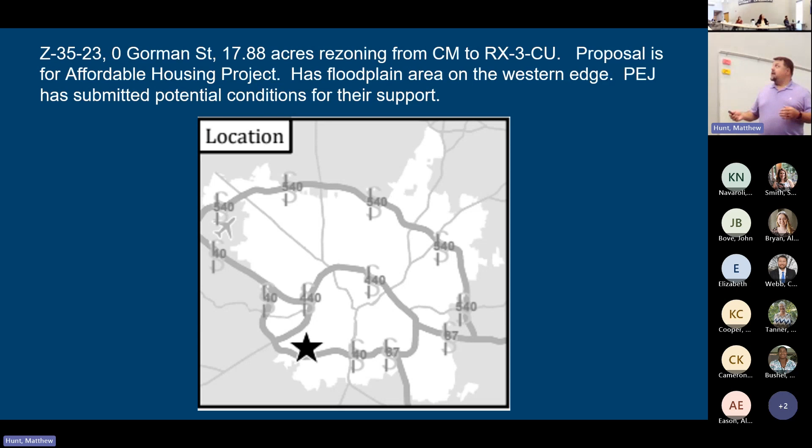So the first one is Z3523, 0 Gorman Street. This is the location in town, on the southwest side. Basically going from conservation and management, which is essentially a zoning district where you can't do anything except preserve that area in its natural state, to RX3 conditional use, which would allow a denser 3-story building, usually like an apartment building or something like that. So this is the zoomed in area on Gorman Street here, outlined.

The floodplain is on the western and northern edges of the property here. I've also done a topo map, not great to see on the presentation, but everybody crowd around and look at it. You can see topo lines. The southern portion is pretty flat, and the more northern portion has got some more fall, but it looks like a continuous slope going down to the creek.

Essentially what they're looking for, the applicant has stated this would be for an affordable housing project, which is something the city is very much in favor of, getting more affordable housing, but it does have some floodplain issues. The Partners for Environmental Justice have actually commented to the Planning Commission with 6 conditions they'd like to see added, one of which is completely around staying out of the floodplain and that sort of area.

They didn't recommend disapproval or denial. They just sent it back to the city council to schedule a public hearing, and that was to allow the applicant to possibly incorporate those conditions that the PEJ had asked for. So that was why it was deferred to city council Tuesday as well.

On the October 17th meeting, the applicant will incorporate all those conditions in some form or fashion. I believe Wade was out at the PEJ meeting last night, and they did discuss that they were having those discussions with the applicant. So that's where that stands. With that being the case...

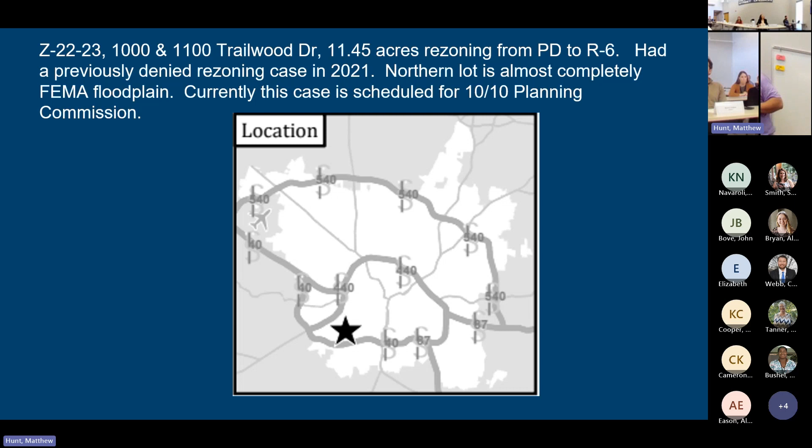The next one is, like I said, the one we talked about previously last month on Trailwood Drive. The star looks almost exactly the same place, apologies, but it is pretty close to the same zoomed out location. This is the one that has one lot that's almost completely floodplain. The other lot is at the top of the hill, not really floodplain, but it's adjacent to some neighbors in the ETJ that don't necessarily want townhomes or apartments next to them. This one's going from a planned development district to R6.

Issue one about this one is it was a previously denied case back in 2021, and it's back for similar approval now, so it's curious to see what kind of conditions we're putting on this one. Currently, the case is scheduled to go to the October 10th planning commission, so it's not even close to setting a public hearing at this point.

The Partners for Environmental Justice has this on their radar too, and they were going to take a look at this case and possibly submit something to the planning commission for their consideration as well. Staff has stated that we'd like to see them stay completely out of the floodplain, because even though we've got the UDO ordinance, there is a variance mechanism in that.

That was not a legal way I said that at all. I apologize for me stumbling over that. That's what I was trying to wrap my head around.

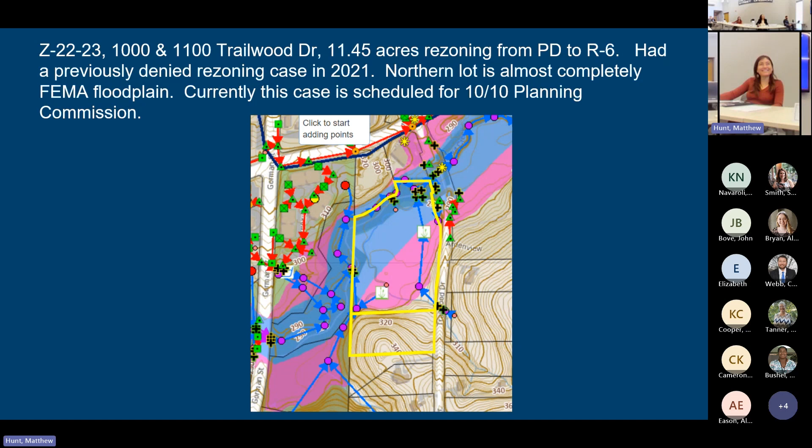Any other questions?

So this was all on the northern side of town. Up on Strickland Road, in the Falls Lake watershed, 16.25 acres going from R4 to R10 - R4 is 4 units per acre, R10 is 10 units per acre. The curious thing about this one is it was a previously approved rezoning case in 2021 to go from R1, which is more rural residential, to R4.

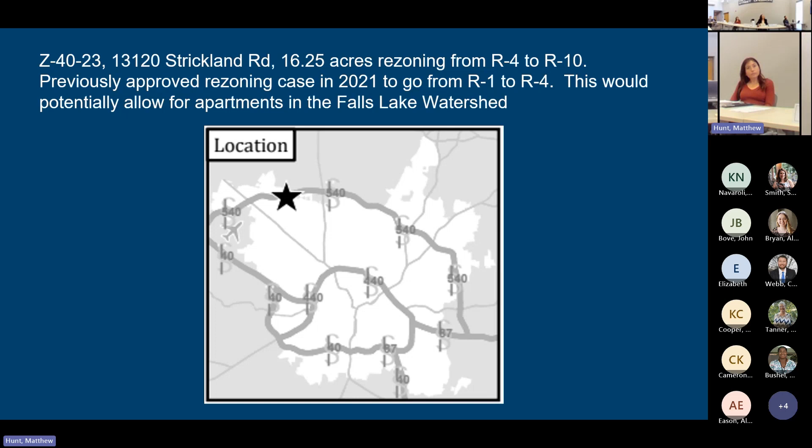So this would potentially allow for more density and possibly apartments. I'm not sure exactly how the R10 section works with garden apartments in our Falls Lake watershed. This is Strickland Road and Leesville Road, and there's a Harris Teeter Shopping Center right here that drains away from the watershed. This undeveloped piece drains for the Falls Lake watershed.

I know there have been some design issues from the 2021 case where this Neuse River buffer stream was restricting access from the south. There was talk of going through this neighborhood street, which is a built street to their property line. I have not seen what their updated site plan is for this one. Right now it has gone through one round of review from staff, and we've asked a multitude of questions from many different trades, and we have not heard back anything from them.

I appreciate this being brought on our radar, especially in light of discussions we're having with the Swift Creek area of land, and this kind of dovetails into that proposal. I think there'll be much more to come on this one, so it won't be falling off our presentation anytime soon, since it's not even set to go to planning commission yet.

This site's going to look at a lot. This one was flagged for me by some folks who live in the area, and I know the previous Neuse River keeper walked the site. One thing they brought up that's not on the map is just to the east, a little public park - I'm not sure what stream runs into Falls Lake, but it runs through this public park. There was concern about stormwater impacts to the public park, as well as the topography, which we can all see.

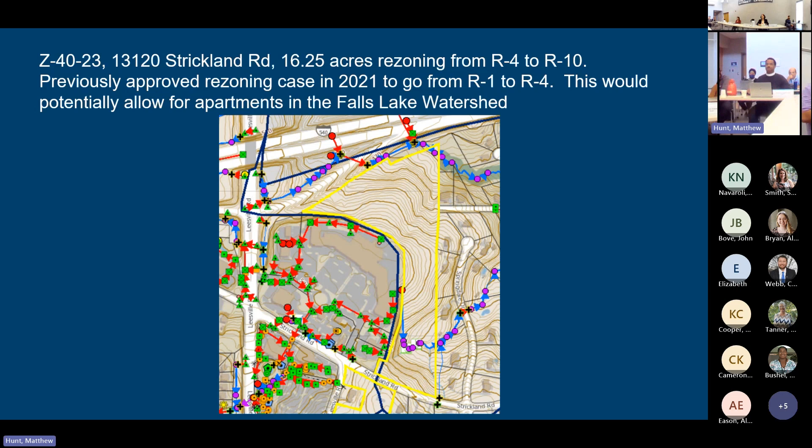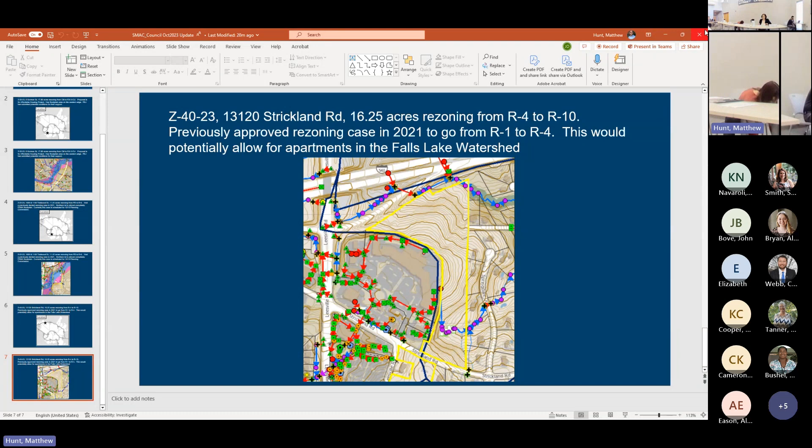All right, the next item is the SMAC work plan conversation. This came out of our meeting last month, around having more ownership around the work plan, which is our document. So this will be on the agenda every month to keep it before us. If you have your PDF, the work plan begins on page 9. I thought it'd be worth looking at this, not spending a ton of time, but I wanted to codify it in the agenda as a constant item. Any comments on the September meeting as you look at the work plan for 2024, things you want to discuss?

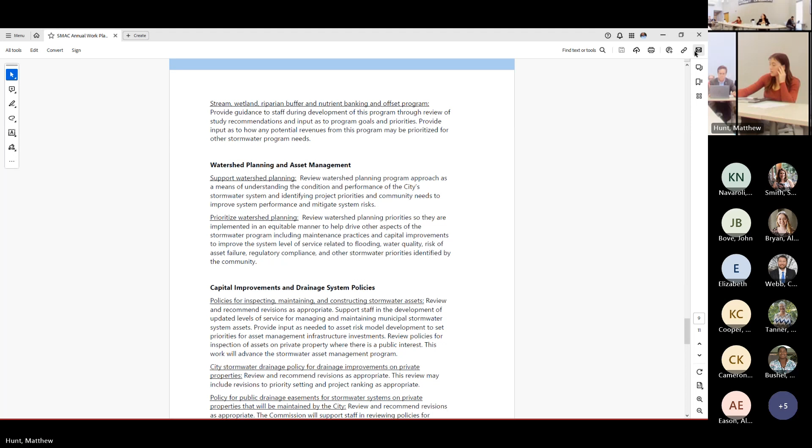I know we talked last month about maybe a subcommittee. It escapes me, I think it was David who suggested it. I guess the minutes would capture what specific subcommittee that was, if I remember. So I typed it to be. Okay, so I just want to hold space if there are any comments.

It was item number 7: development of enhanced stormwater utility crediting policy and program. Does that sound right? Which page - the group PDF is page 9, let's see, this is page 11. But that's not right, it's like 5 but not 5. I guess I'm looking at two different documents, and I didn't even talk about it. Yeah, that's the annual report, page 3 in that document.

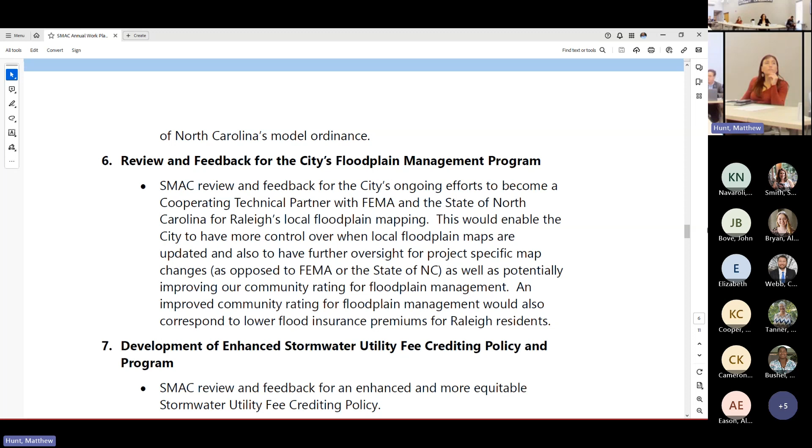Right there on page 5, just scroll up. That's it, yeah, right there - development. This is a topic we have a consultant studying ongoing right now, and I do think it could be appropriate for SMAC to have a separate group discussing this. We could bring this forward as an early draft with the ideas that have been explored - that might be the appropriate time to send it to a committee for a little bit more feedback and discussion, if that was something the commission desired.

When would that be, what's the timeline? Pat, what do you think, or Scott, what's the timing when we might have a draft on that fee credit? Early next year, maybe. Okay, alright, so we have some time. Good, yeah, I think that's something. What do you commissioners think? Are you going to present it again? I mean, you guys presented it. Yeah, so present it.

Yeah, then we could make a subcommittee. Okay. All right.

Anything else related to the work plan? I like the idea that it's part of our agenda, the last thing, as a reminder - we've used that on other boards and commissions too, just to make sure we're thinking about what we said we're going to do.

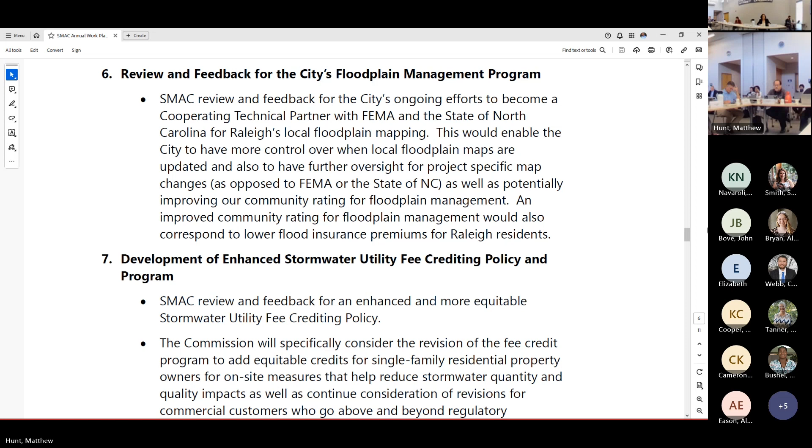All right, Wayne. We don't have staff updates, but I'd like to take this opportunity to introduce Mr. Whit Weaver, who has joined us today.

Mr. Weaver's here primarily, I think, for the update from the Upper Neuse River Basin, which will be a presentation later on in the agenda. Forrest Westall is also here to present. Thanks for joining us, Whit.

I'd like to also acknowledge Ms. Ann Franklin, who's here - a former city council member with the city of Raleigh, and also currently serving on the board of Partners for Environmental Justice. So thank you for joining us.

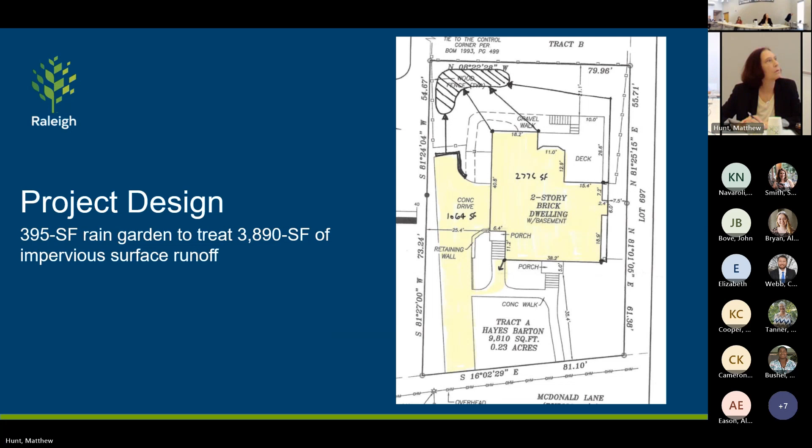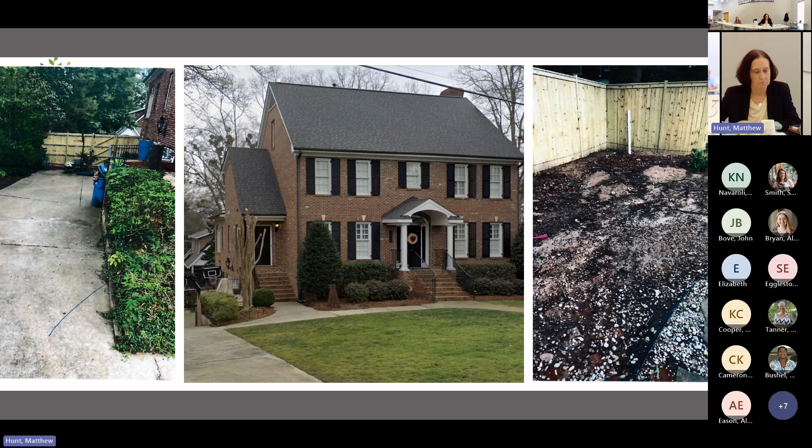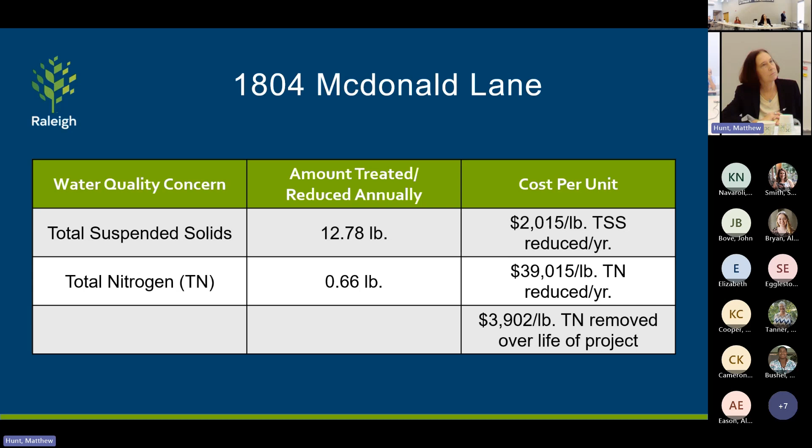Pollutant removal chart - we are removing 0.66 pounds annually of nitrogen. Here are these cost metrics as you've seen in the past, the cost per total nitrogen reduced per year and the TSS reduced per year. I'd say that's fairly in the mean, a little bit slightly above the mean of all projects for rain gardens.

3704 Bryn Mawr Court. This is in the Simmons Branch watershed, which is a 75% zone. This is another 300 square foot rain garden, fairly large. Here's a general project design that's designed to capture 3,000 square feet of impervious surface.

As you can see, there's a driveway, walkway, and rooftop that all goes to one rain garden in the back right corner. Also, not on this map, right on the fence line to the north is a sanitary sewer pipe. I didn't have a plat map, so I wasn't able to present that, but we've confirmed by email they will stay out of that maintenance easement. There's plenty of space for that.

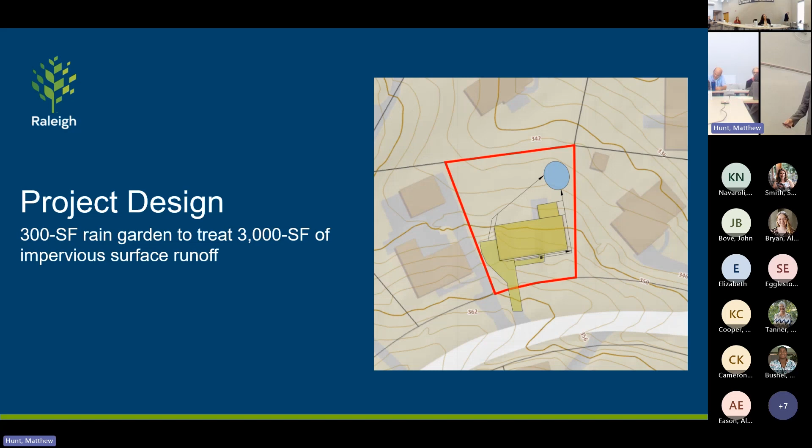Yeah, this one was quite an interesting scenario because he was getting high costs, upwards of almost 17,000, and that was pretty typical, and he was having a hard time getting 3 bids, so we pushed back on him.

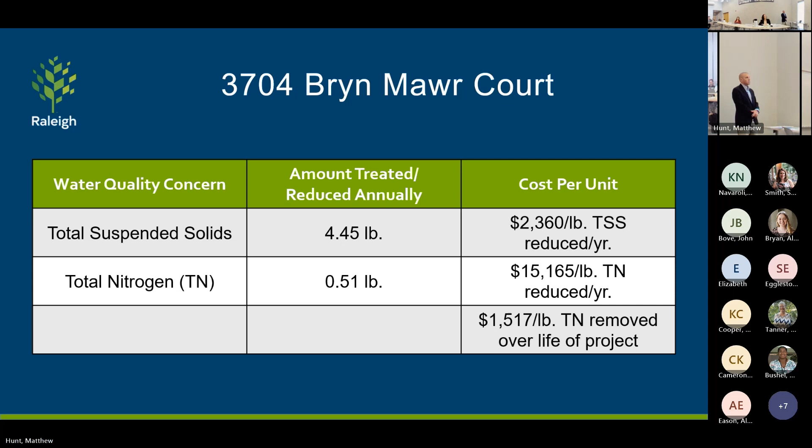Yeah, very good metric.

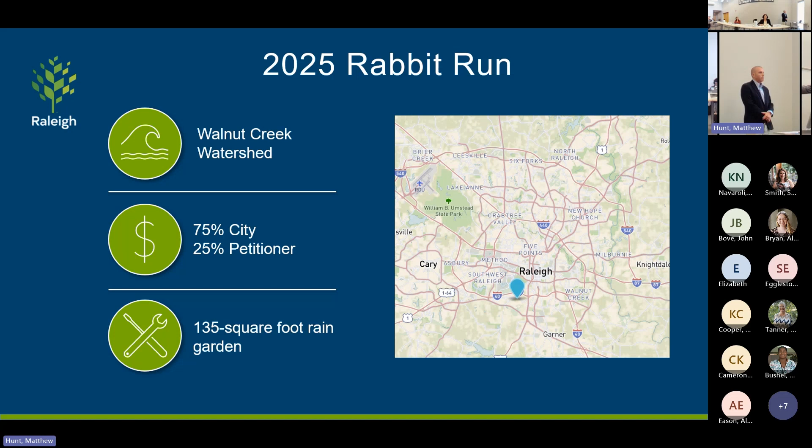Right, next project, 2025 Rabbit Run, which is in the Walnut Creek watershed, 75% reimbursement zone. This is a smaller rain garden at 135 square feet. Project design treats 1,350 square feet of impervious surface. So essentially, it's roughly half of his rooftop plus some of his driveway.

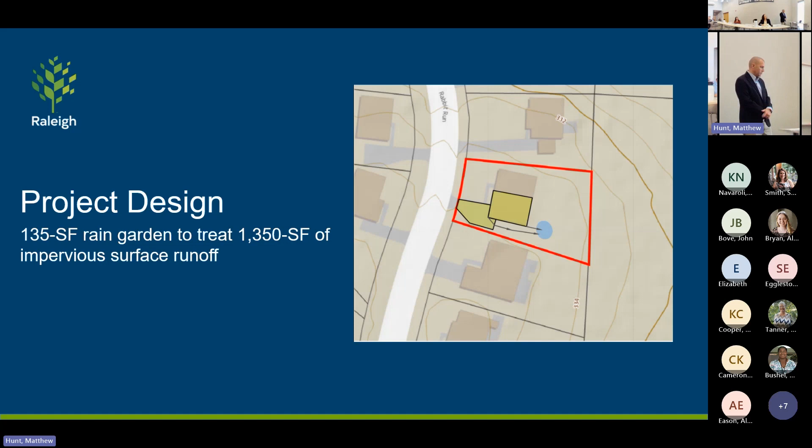Cost breakdown, 10,500. Two cost estimate line items are to the left based off the estimate and the cost breakdown for the cost share.

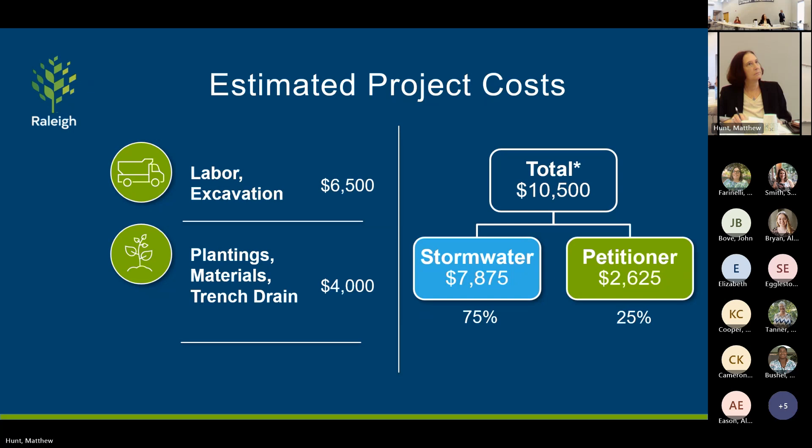Significantly lower pollutant reduction, so 0.23 pounds reduced annually for total nitrogen, and 4.45 pounds of total suspended solids. So as you can see, this metric is high comparably, but it is below the $7,000 per pound total nitrogen.

And lastly, for me, is 3327 Cheswick Drive. This is located on the north side in Big Branch, 75% zone. Once again, that comparable 291 square foot rain garden.

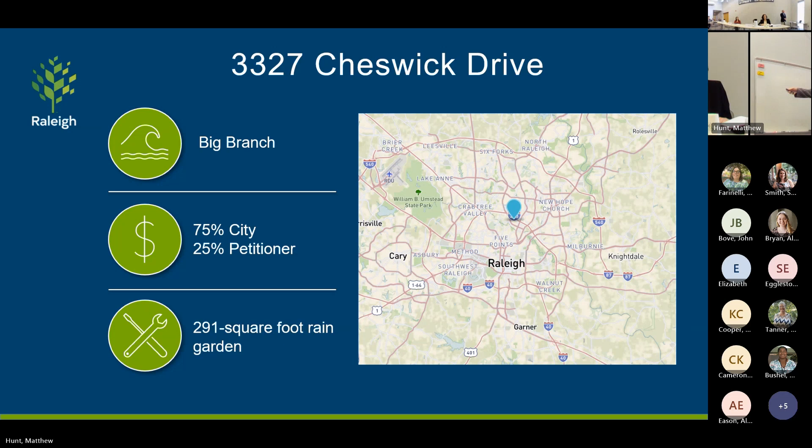So this project design is going to have, let me go over here, it's going to have 2 rain gardens, one located to the left and one located to the front right there, for a total of 291 square feet of rain garden, to treat 1,914 square feet of impervious surface, so a little oversized.

Total cost for this is $21,088. Their cost estimate broke down to 2 rain gardens, and their labor and effort: 11,047 and 5,754.

This portion of the concrete is going to be removed and replaced with that footprint of that rain garden. So those costs are represented here, this concrete removal. And then you had a separate line item, or the company had a separate line item for plantings.

Total nitrogen removal rate similar to the first two I presented, at 0.41 pounds. Total suspended solids is 6.94 pounds. This is a very high metric in comparison with other rain gardens, at 51,434 pounds reduced per year.

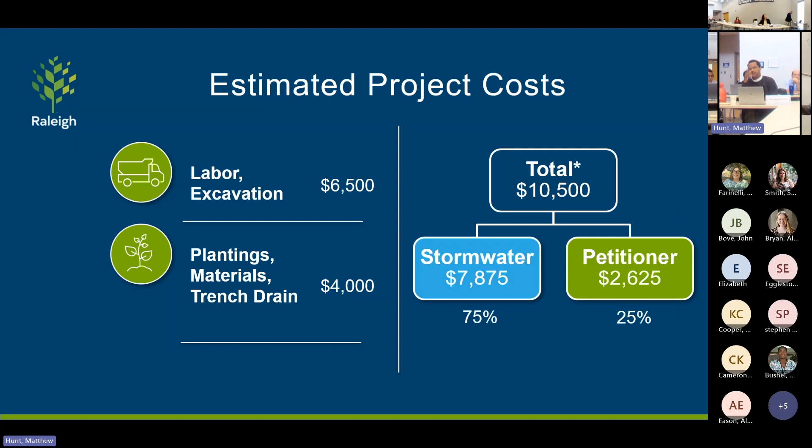The previous one, Rabbit Run, you had an asterisk by total and I didn't see it. Oh yeah, that's a great question. I apologize, I meant to disclose that. What's that asterisk? So in relation to Nicola's question...

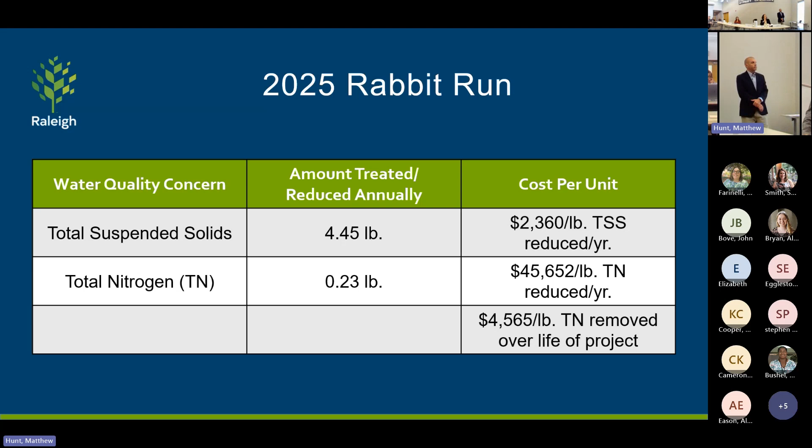For example, $10,500 was the newest low bid that they got. The next highest bid, I believe—and I have a graph at the end here—was in that $13,000 to $17,000 range, and they were bidding at $5,000. So typically we would say, hey, this is the basis for reimbursement, you disclose this. But they gave justification, and I wanted to present that to you.

That's true, and I apologize, I missed that asterisk, so I appreciate you asking. So the Braemar family or group did not request it—they did actually request it, but at the time we were going back and forth and they accepted the end result based on conversations with Justin, that they would use that $7,000-plus bid. This was actually a pretty good exercise that Justin and I went through, working through the legal side of this and what was approved with council.

All right, Cheswick breakdown. Good. All right, I'll hand it off to Justin.

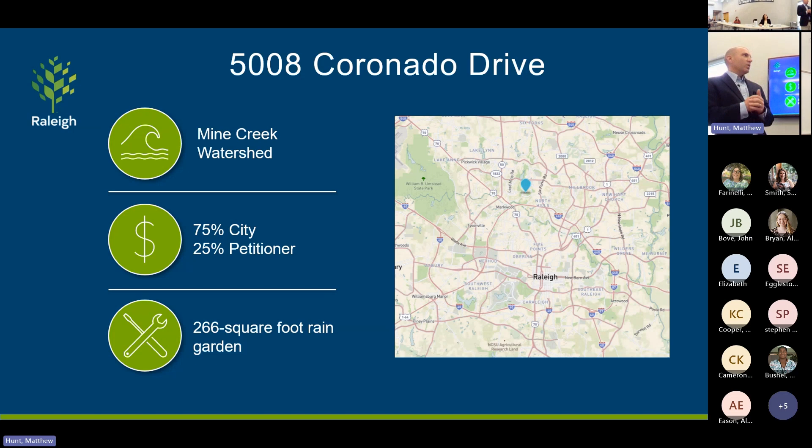Yeah, and just to remind the commission of what our policy does require: it says in the narrative of the policy that for projects over $5,000, we need to get multiple bids. It's vague, so we applied a procurement rule guidance to get three bids, as we would if we were doing city business. So where the nuance lives is in how we do our due diligence and how we confirm that the applicant does their due diligence.

That's where a lot of times we'll get proof of 3 estimates, and then we'll look at that metric, which is the language of this program and how we communicate these projects to you guys. At the end of the day, the metric is really that main comparison factor. But just know that's the inside baseball of what occurs when you see a final number up here.

There's that conversation. We need 3 estimates. We need proof of due diligence. We need to document our due diligence. Look at the metric on the slideshow.

So just a quick jump in there. I've got 3 more rain gardens. We're almost in the clear here. Coronado Drive, Mine Creek. I have a small one, a medium sized one, and a large one. This is the medium sized one that I'm going to present to you today. It's actually 2 rain gardens.

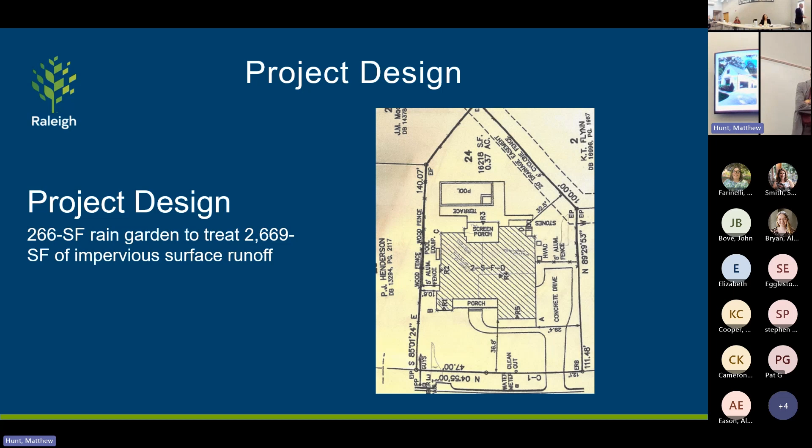You'll see one up here near the right of way, but I confirmed that it's not going to be in the right of way. And there's one in the back right corner, which is going to be near a drainage easement, but not in the drainage easement. So I have confirmation of that and broken up drainage areas on each side. You'll see the home here, some driveway, some roof going to the back, just gutters going to the front.

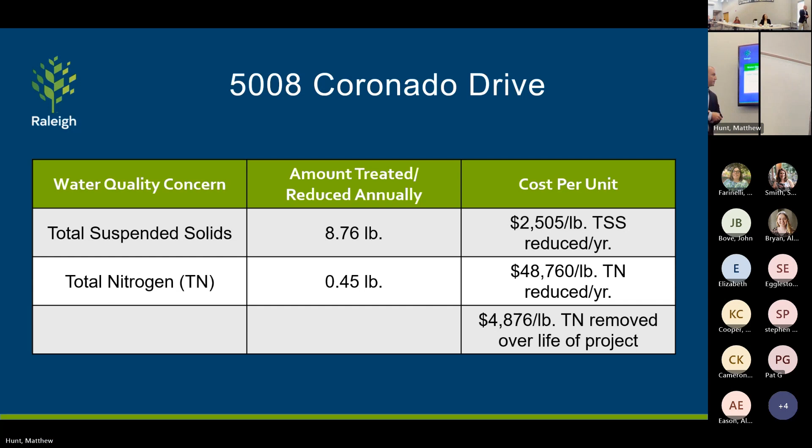So that's Coronado Drive. So if that was the medium sized one, this is my large one, 418 square feet. That's a significantly sized rain garden for somebody's yard. This applicant has a pretty large yard, big side yard. And so what you have is a lot of driveway, about half a roof, and a patio all going to this point. Otherwise that water goes down the hill on the neighbors, on the streets. So this is capturing it up closer to the source.

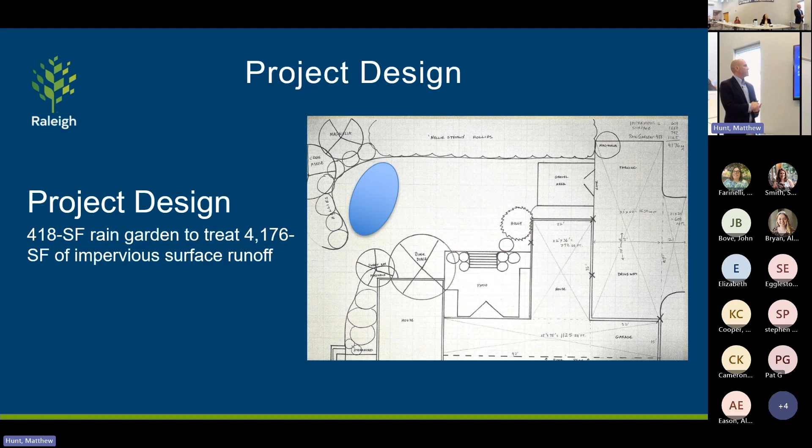You can see all that asphalt actually comes through this area. This is on the way. If you're going to do a future walking tour, you'd walk through those gates and it would open up to a rain garden. Try to document some of the impervious surface that this property has and where it would go.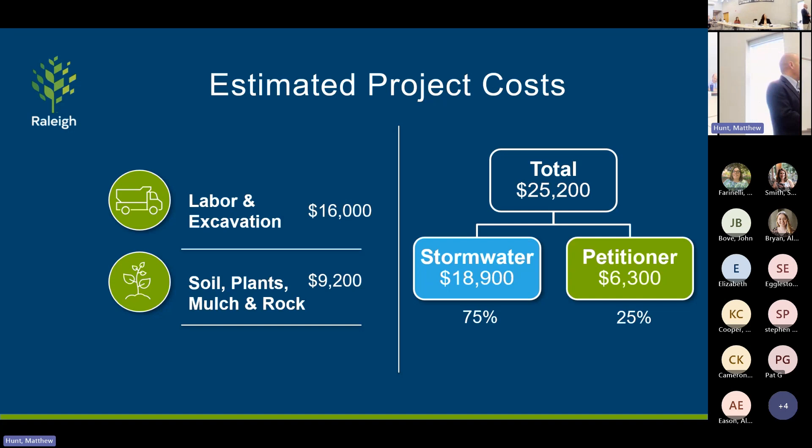Total cost, right at 25,000. See the breakdown, 75%, 25%. Low metric, primarily because of the amount of impervious surface. I mean, you're capturing more than almost all residential rain gardens, over 4,000 square feet.

And moving to my last one, this one is the unique one of the 7 we're presenting today. This one was completed prior to approval. It was completed in July. As stated earlier, the commission has the discretion to review one that's been completed or started prior to approval. They were on a timeline with some landscaping work and some renovations where they needed to move forward regardless of the city schedule. So they went ahead and moved forward.

It was partially DIY, partially utilizing that on-site contractor. As you see, it's a small rain garden, 110 square feet. They are capturing part of the driveway in one side of their house. And if you see it at the top left corner of the diagram, the rain garden's in the far back or far rear of the property.

It is about 6 cubic feet too small for the total volume going there. So how we handle projects like this that end up being too small, or smaller than what we typically would like to see, is then we back up and only give credit to the nitrogen metric and to all the water quality numbers with what they're actually treating with that. So you'll see that reflected in the nitrogen metric.

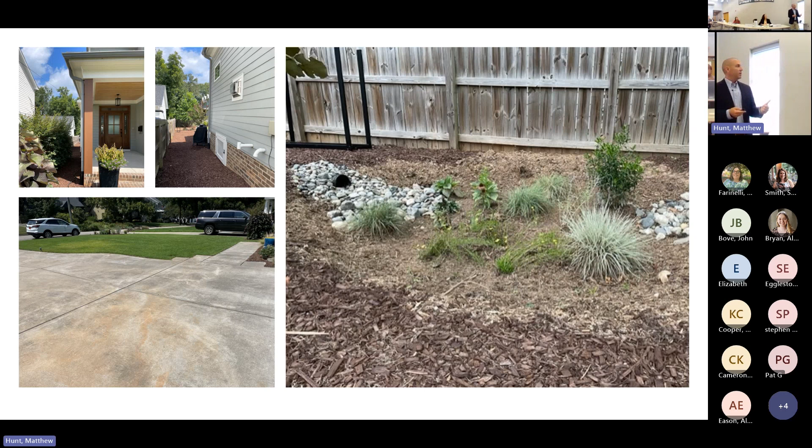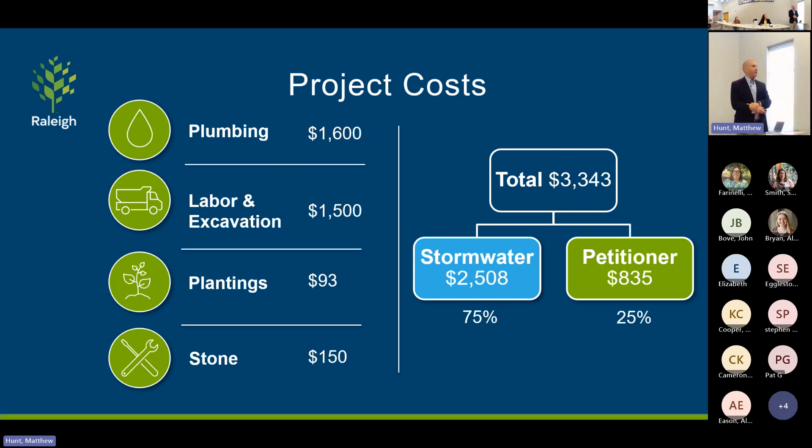Here is the rain garden completed. I was out there after one of the big rain events in July, a pop-up storm, completely dewatered, looked good. So you see very low cost, a lot of DIY work. You can see where they got the contractor involved, a little bit of plumbing. I think they might have done that with the contractor as well, but the rest was design work, and all the plantings and stonework was actually DIY by the applicant itself, or herself.

And I didn't even make my joke. I don't know how to pronounce the street name either. So my mind wants to say 'male' so badly.

But you see the metrics are very low. That's primarily because of low cost. Any questions? I wanted to show these last two slides before we get into the individual ones. All rain gardens, you only get one slide on maintenance today. It's all the same throughout.

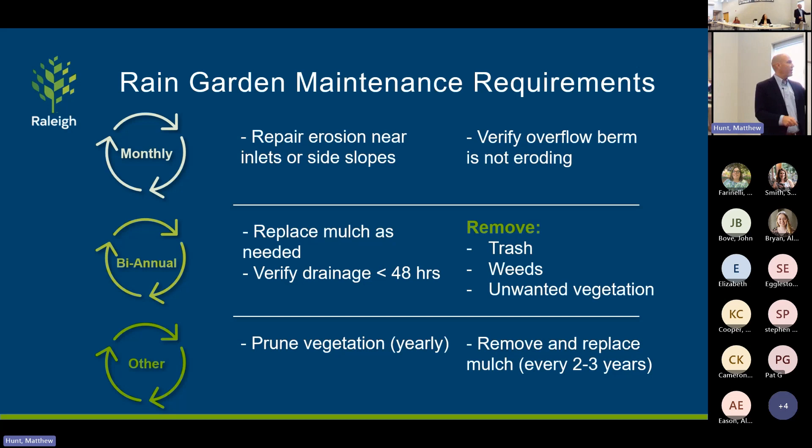We spent way too much time figuring out how to give this information to you guys in a meaningful way. This is a comparison chart for how these rank across the 115 approved rain gardens, on cost effectiveness based on the nitrogen metric. So of 115 projects, Bryn Mawr Court is the 11th most cost effective from a pollutant removal standpoint.

This is the third least cost effective, second, third least cost effective. So this might be a good slide to stop on if y'all want to take any questions or consider any or all of the projects presented. Let me make sure.

2021, they decided you take this number and divide it by the number of maintenance years the project would be in the ground. Well, just so happens all these, except for Mial Street, of course, it's the one I don't know how to say, are 10-year maintenance terms. That's a 5-year maintenance term. So if you want to get the cap metric, you would divide that by 10, or 5.

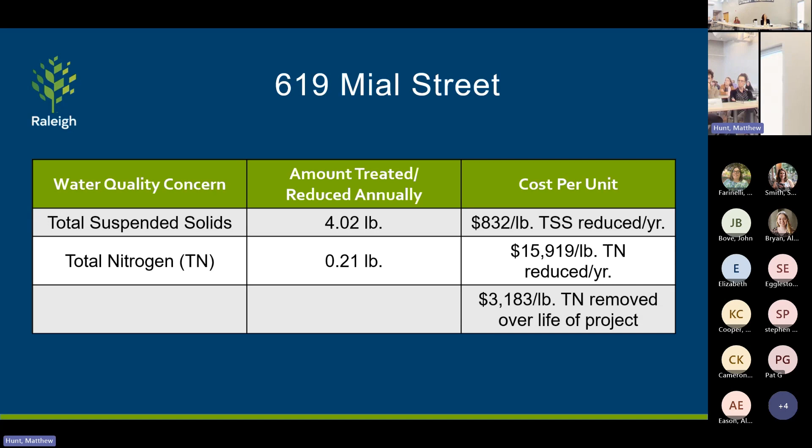Anything above that, and we would have to reduce the amount of eligibility of reimbursement they would receive. So that's the cap we referenced. It is this number divided by the amount of time they have in their maintenance term. So what you're seeing here, we could add another column next time so you can see the cap. But typically, when we're standing in front of you guys, it is divided by 10 that will get you that.

So easy math, thankfully. If you were to look at it through that perspective, you just take the last digit off. Anything over 7,000 would be capped by the program without any action by anybody here. And you can also see why they rank where they do. Does that answer your question, Josh?

So the Cheswick is the second most expensive that you presented. Is that about right? Yeah, that's correct. Okay. Third? Yeah, splitting hairs though. But so close. Yes.

What do commissioners think? Typically we don't spend as much time on this. We also don't have 7. And we also have not been in a place where you're the 4th month in the fiscal year and you've committed money for a project. And so it makes me think about, do we need another metric, another way of looking at these projects, and perhaps planning forward so we don't find ourselves in the position we are now.

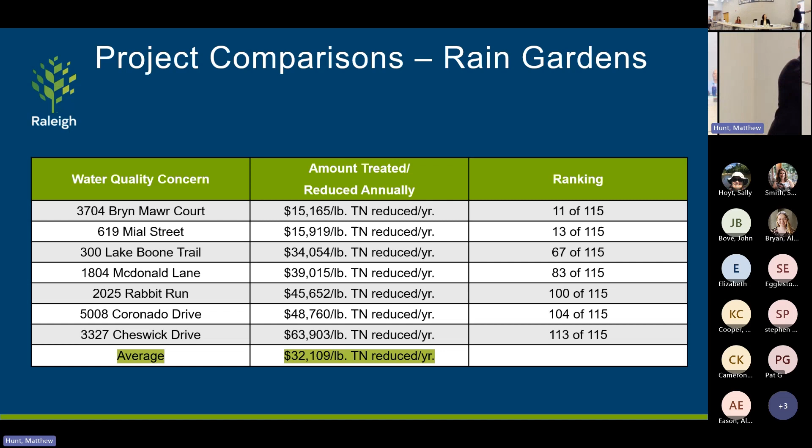So it's the total cost of that one. Okay, gonna jump real quick and make people busy here. Right there, well, back.

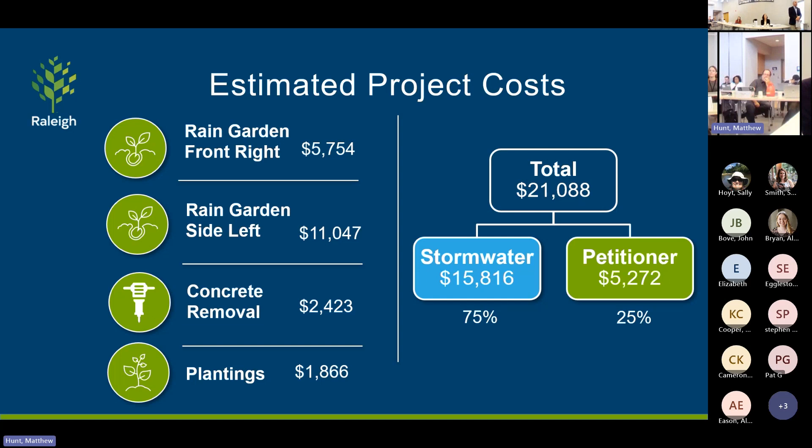One thing that might play into it, just what I've seen - I know Steve is more the expert on this - you are excavating two separate holes in the ground, two separate projects that might pick it up. Is that for aesthetics for the homeowner, or is it drainage related? No, I think it's a confined area.

So on their property line, they're squeezing this rain garden into this area. Obviously this might have more space, but I'm sure part of it is aesthetics, don't get me wrong.

Is that the house in the picture? Yes - actually, I don't think that's the house. That's the other thing that's really confusing here. It's connected to the house and all sorts of stuff. No, that's not the house - it's in the woods, that house.

Maybe I missed it - what's the address? 3327 Cheswick Drive. Because that might just totally be my mistake, since this was me taking something off Google Earth before they presented their drawings. That's next door, to the left of it. Their house is in the trees. Yeah, it's just a picture, not the actual house.

We've had a lot of discussion, but I think they fit within the parameters of the program currently. So I don't know if anybody else wants to not approve any of these. But I would say, looking to the future, it would help to have a price cap on there - something more realistic, like a total cost price cap.

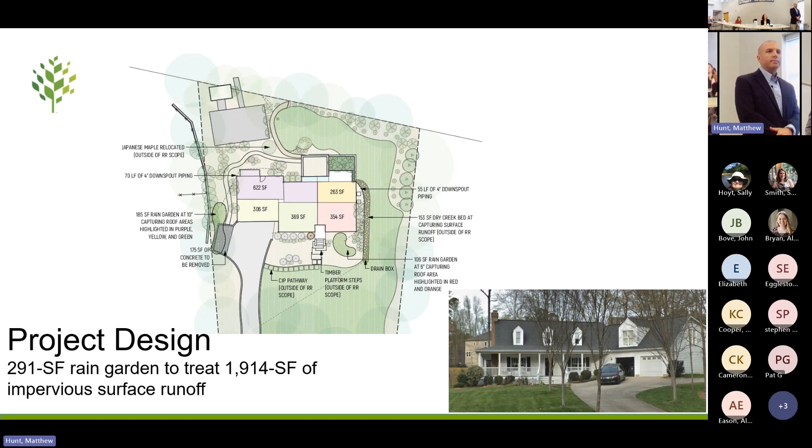I guess you could do it per pound of nitrogen - like yours, this one's just under it. Yeah, you're talking about a step-down cost versus pollutant metric.

I would like to make a motion to vote to approve all of these right now. All set? If y'all are ready - so moved, just to make it official. Is there a motion? Is there a second? All in favor? No opposition? Thank you.

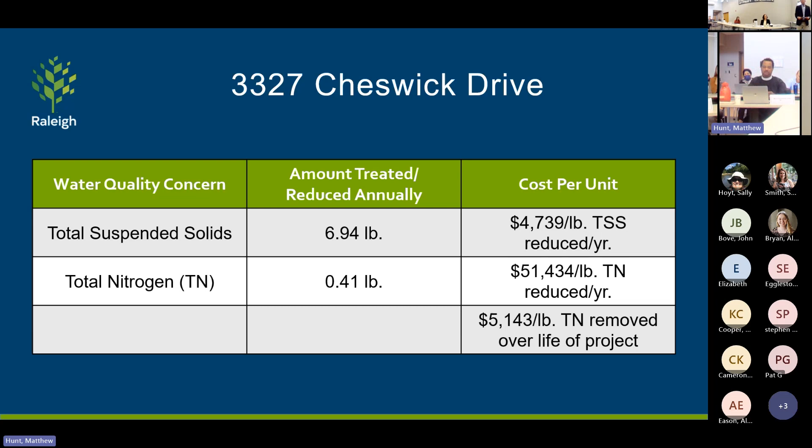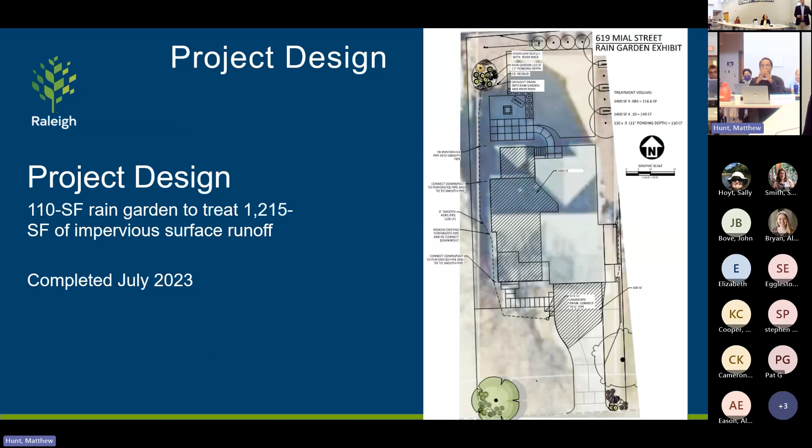Before we yield the floor, I would like to report - and this stems off some of the comments tonight - I'm excited to report we are working with an outside consultant over the next 10 months or so. It's called the R3 Enhancement Project. We hope to bring Raleigh Rainwater Rewards up to speed with some of the pollutant calculation tools, like the SNAP tool that other programs are using, moving away from the simple method. We've also tasked this consultant with bringing forth recommendations for the program on how projects are reviewed, approved, and compared, and we hope to get the commission's feedback on those recommendations. We're looking at a January through April timeframe, probably with 2 meetings for input from the commission.

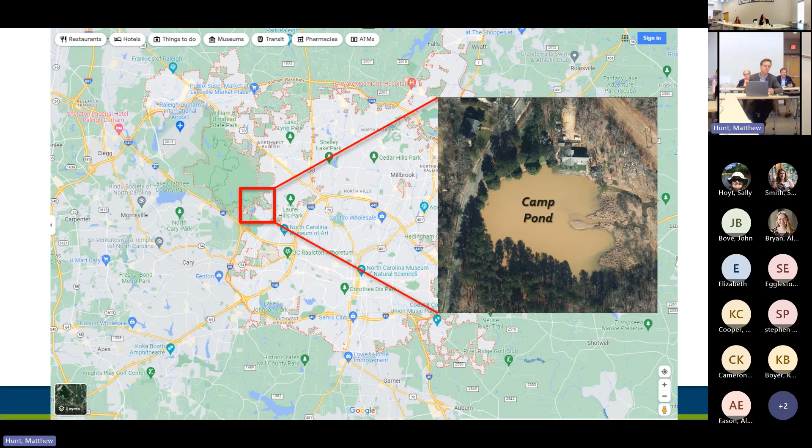Camp Pond is located on the northwest side of Raleigh, just south of Umstead Park. I don't know if you can see the green area just there—that is Umstead. We're just outside the Beltline.

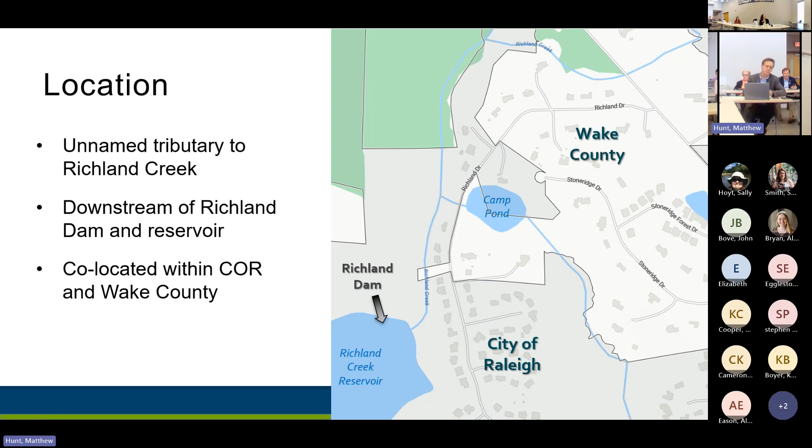It's both in the incorporated areas of the city and also the unincorporated areas of Wake County. You can see the dark gray area is Raleigh and that lighter area is the county. There are 5 owners to this dam—4 private owners and 1 public, that's City of Raleigh. We own and maintain the right of way of Richland Drive.

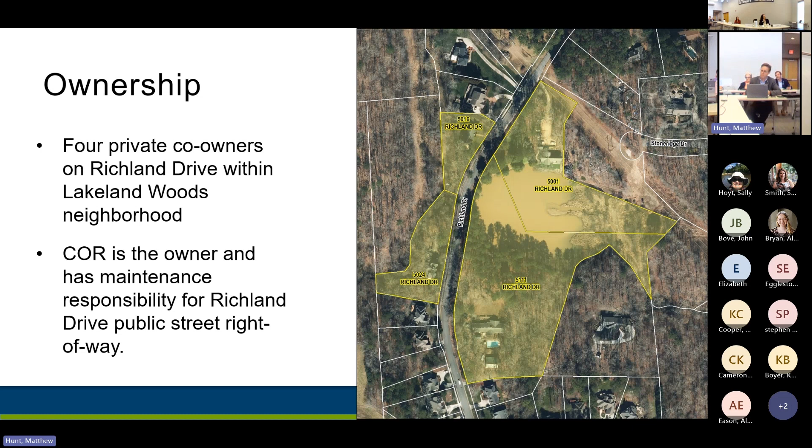Should there be a breach, there's roughly 50 properties that would be isolated, would not be able to get out of the subdivision, nor could emergency crews get in. So the do-nothing alternative is really not an option for us on this one. We did investigate other options to come in outside of this Richland Drive area, and none of those were possible.

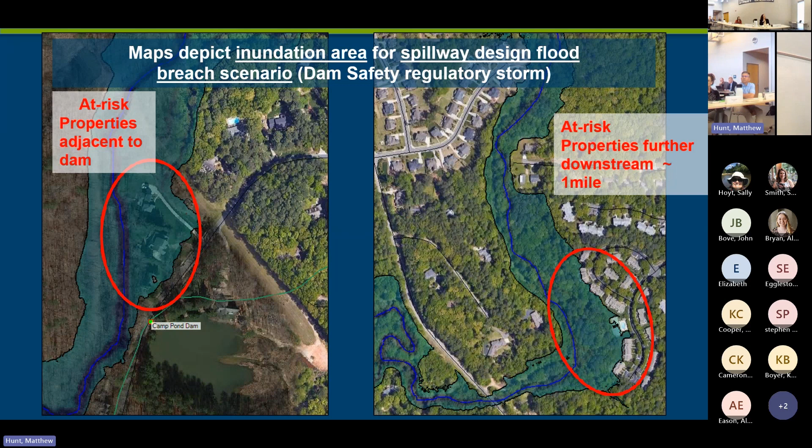Camp Pond is a high hazard class C dam because of its potential for loss of life. There are 3 structures located immediately downstream of Richland Drive. On the left side of this image, the right side shows 6 homes subject to, or inside, the inundation zone should there be a breach of that dam. Those are located a couple thousand feet downstream.

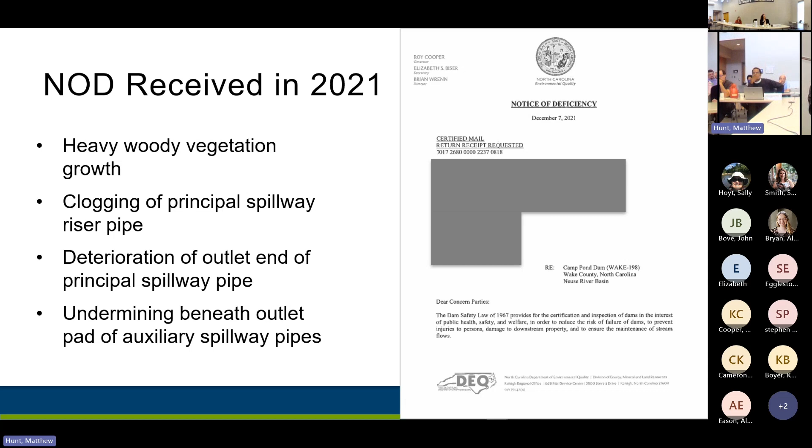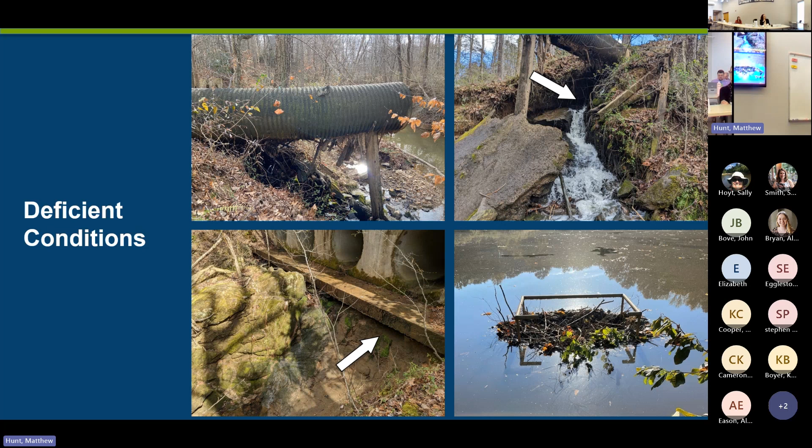So here's some images. There's the corrugated metal pipe that's perched, that has a bottom that's falling out. Here's some of the woody debris. This is the quad 60-inch barrels with scour occurring and potentially jeopardizing the function of those culverts. You can see water flowing through the bottom of the culvert.

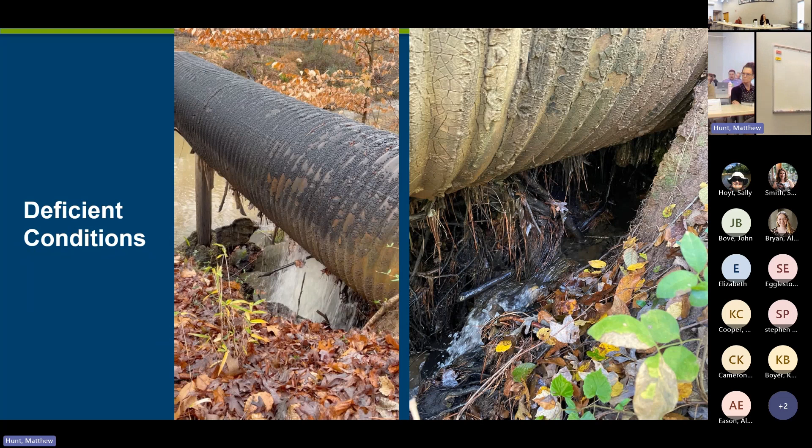This culvert is corrugated metal. It's failing, rusted out and well past its life expectancy. And that's the urgency of why we're really here today—that culvert itself.

So again, an engineering study was performed by our engineering consultant. Alternatives were evaluated, and I'm going to turn it over to Maureen. She's going to share with you some of the formal notice.

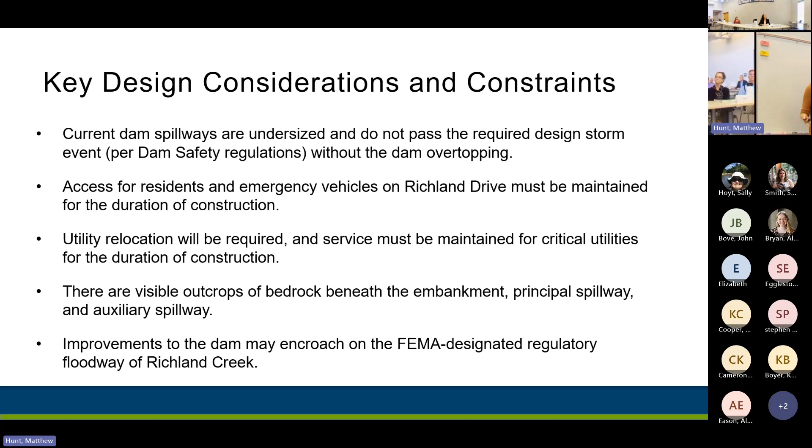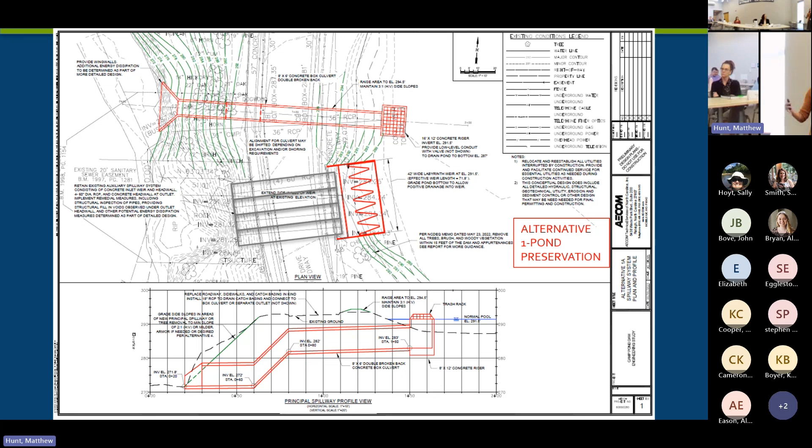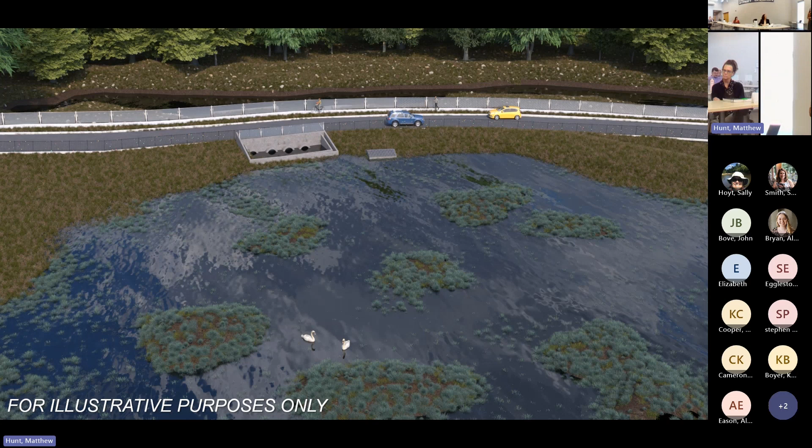We know that sedimentation in the pond is an issue, so this kind of reflects that. One thing we would propose to do with the design is to move this principal spillway a little bit farther away from the auxiliary spillway. We think with the size of the excavation needed for that larger spillway, we'll likely want to give us a little bit more space between the auxiliary spillway and the principal spillway for constructability purposes.

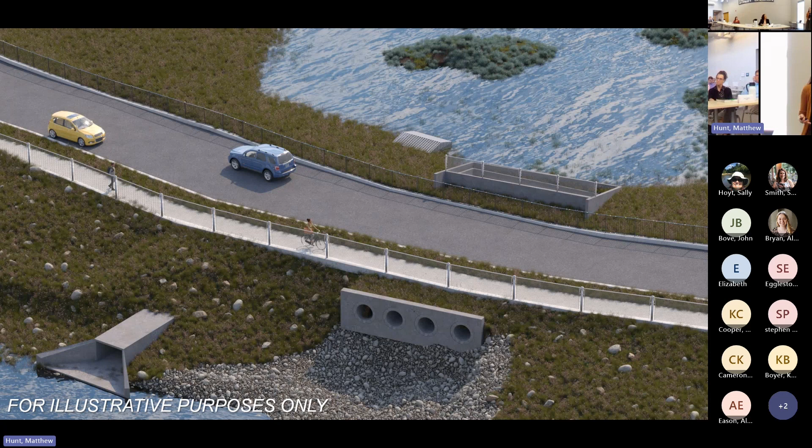But the one thing you'll notice is the lack of trees. Dam safety has a lot of concerns about trees, especially large trees on dam embankments, and how they might impact the integrity of the embankment. So very likely that a lot of the trees that are here presently will have to go during construction. It also helps facilitate maintenance in the long term — it's really hard to inspect a dam if you can't see it because it's covered in trees.

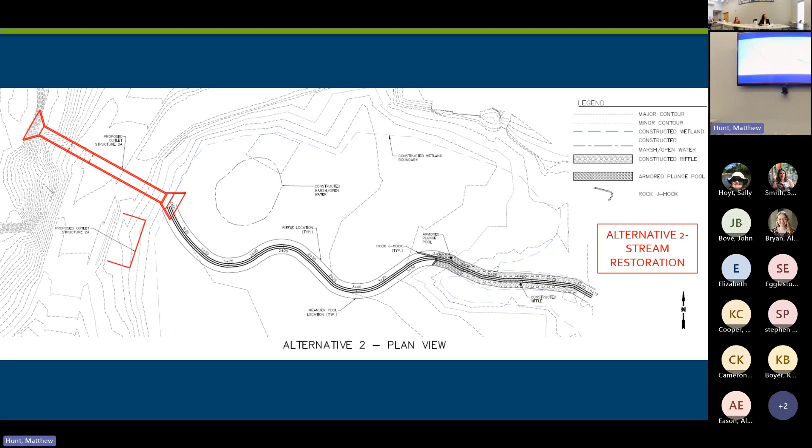And then what we would do is there would no longer be a riser structure on the principal spillway. We would be lowering that culvert all the way to the bottom of the current pond to allow the stream to reestablish through what is now the existing pond footprint. So we still have to have the spillway because we still have to pass the large design storm. The weir length does not change from the existing configuration — it's just extending the sidewalls of the weir and lowering it so that water can get into it near the bottom of the pond.

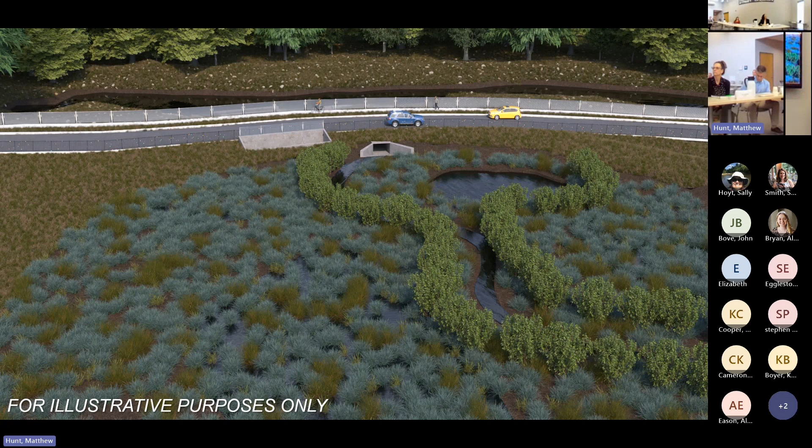So you just have an open culvert instead of that riser structure that we're used to seeing there. And this is the artistic rendering that goes along with this one, to see what we'd expect it to establish into over time, eventually filling in with wetland vegetation — hopefully a stable stream with some vegetation that requires little maintenance over time. And then this is kind of a little offline, a little bit of a deeper pool area that represents currently where the deepest part in the existing pond is. We propose keeping that just for a little bit more habitat enhancement, maybe a little bit of water quality benefit.

Now this is alternative 3, so this is what we term the hybrid alternative. It's kind of like a compromise between the pond and the stream restoration — more of a wetland alternative with a smaller pond. So a little bit of the stream restoration, and then it opens up to a larger open water area. It's like alternative 1 and alternative 2 combined, with a smaller pond.

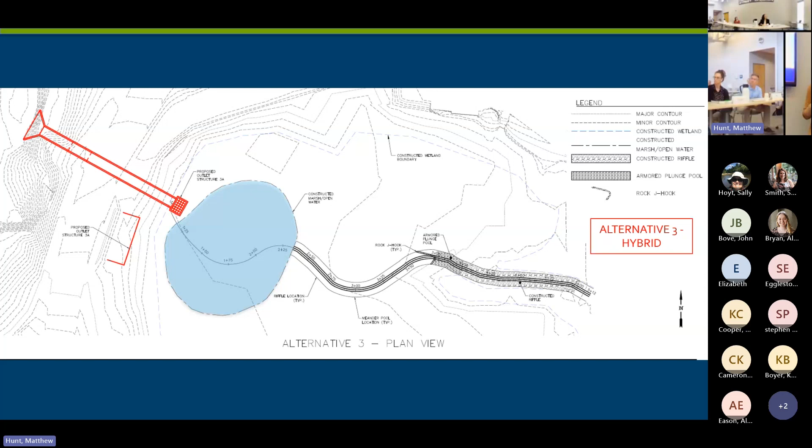With this one, a similar configuration to alternative 1 with the 8x6 box culvert principal spillway, a smaller riser. Compared to the current dam configuration, we would be lowering that spillway a little bit, effectively creating a smaller pond with a lower water surface. Again, the weir length would stay the same as existing, but extending it to get closer to the elevation we want it to be at, where it's activating that weir more frequently.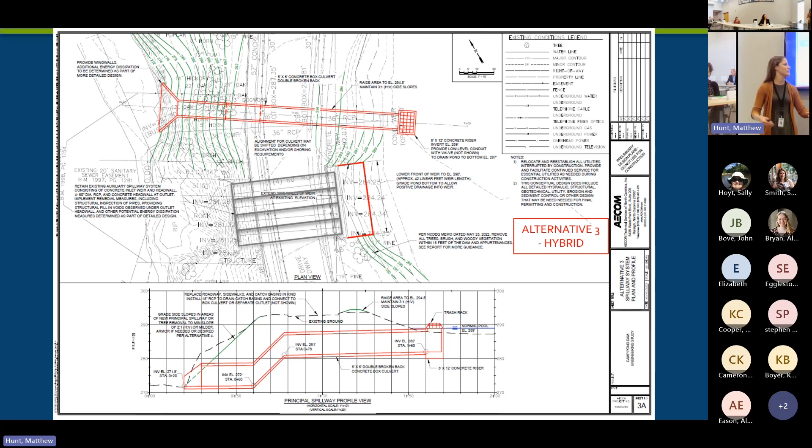And this is the rendering that we did for that one. You see a smaller pond — not as shocking a change as seeing your pond turn into a stream, but more of a compromise where, over the years, this would become more filled in with wetlands, and when you have a larger storm coming through, maybe a little bit wetter.

This is kind of a technical summary of the three alternatives side by side. Alternatives 1 and 3 incorporate an 8x6 culvert; alternative 2 has a slightly smaller one without the riser structure. For the emergency or auxiliary spillway, alternative 1, with the labyrinth weir, has the longest weir length, and alternatives 2 and 3 are the same as existing conditions. The difference in hydrology: the pond stays the same with alternative 1, alternative 2 the pond goes away, and alternative 3 is the smaller pond, to put it simply.

This is a high-level cost comparison, based on conversations we've had with contractors, and unfortunately it kind of reflects the reality of doing this kind of work today. There's a lot of uncertainty and complexity. Some of the major cost elements include utility relocation, shoring, rock excavation, and dewatering. Traffic control is going to be a major one, since we need to keep a lane of traffic open for residents to get to and from their homes. And then there's a high-level estimate of the long-term O&M costs.

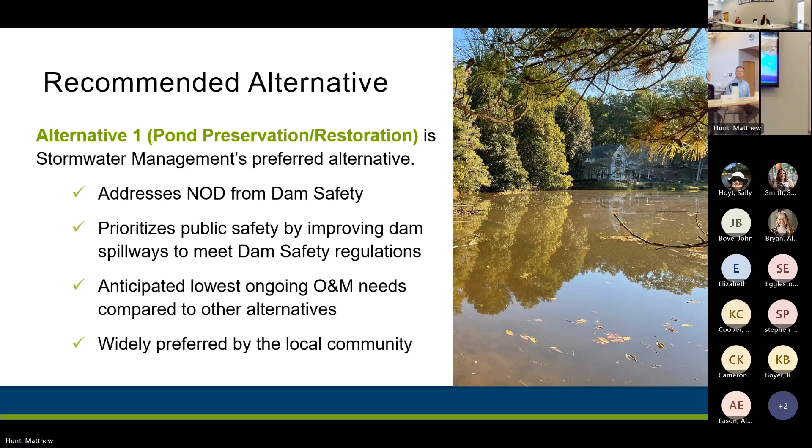So I'm going to touch on schedule. We're looking for SMAC approval or authorization to move forward. Design for this project is about 12 months, that's something we can control, something we've done in the past. We've had other similar projects, so we have an easy way to come up with that. Permitting is typically around 4 months for a dam like this.

Construction is something that has variance, it just depends on when we start. If we start at the wrong time of year, it might take a little longer, but 12 to 18 months is generally what a pond or dam of this size takes. So this is roughly the schedule: if we were to start in November of 2023, we would end construction roughly in the middle to end of 2026, around August of 2026.

The alternative 1 costs are $5.8 million total, based on preliminary estimates right now, with $4.8 million in construction. That design fee includes surveying and also includes 12 to 18 months of construction inspection time, which is a fair amount of money.

So I'm going to wrap it up, and we're going to turn it over to questions and answers, and discussion if you've got any.

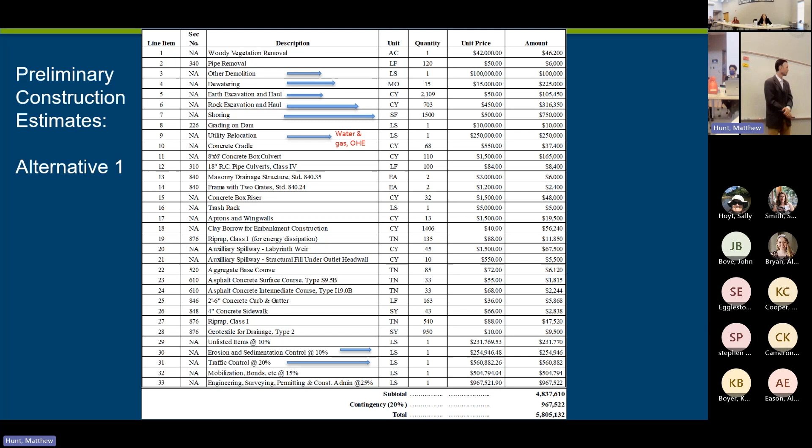It's a good question. We did a slope stability analysis with our geotech team, and the dam is stable, at least based on what we can see, because it's so overgrown with trees it's hard for dam safety to get a thorough inspection of the structure itself. But our assessment, based on our initial geotech, is that the dam is stable. It's more the infrastructure—the spillways—that have the deficiencies.

As the trees come off and parts are rebuilt, does this cost go up, in case we find the dam itself needs work—is there some 20% contingency built in? I'd say it's a possibility, but this cost already incorporates regrading the downslope of the dam to a shallower, more stable slope, and adding stabilization measures like riprap to make it easier to maintain and prevent scour.

That'll be one of the big design challenges for this project—on the downstream side near Richland Creek we have a lot of scour, as seen in some of those photos. So a big part of our cost is coming up with an outfall that's stable at both the auxiliary spillway and the main spillway. It's a challenge because of the sheer elevation difference between the pond and where Richland Creek presently is, which has quite a steep drop off, so that's a major design consideration.

You have a question? I answered my question, I see it here, okay. The utilities or gas.

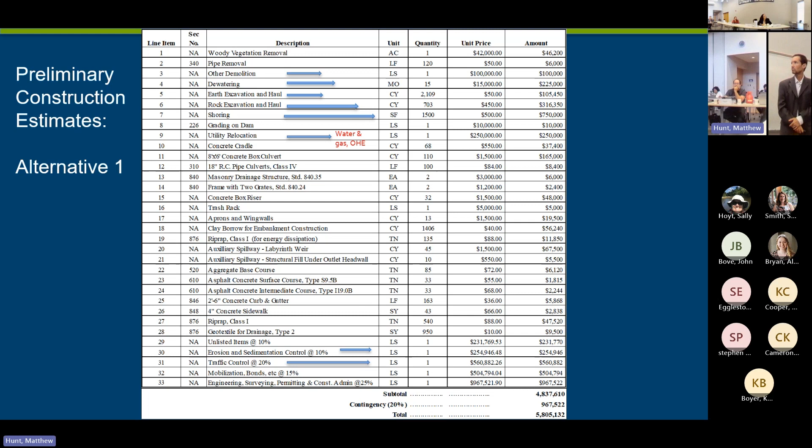Would you scroll back to the decision table? I was wondering if you could share a little more about the water quality and habitat piece and how those numbers came together.

Surprised to see that for water quality, the stream restoration piece was so low, and I'm wondering how that ended up that way. I guess our consideration was more on the retention aspects of a pond versus a flowing stream. So the pond ranked higher than the stream because it has more retention time.

With that consideration, that would be more like a TSS benefit, the settling. And then for the wetland hybrid option, we gave the highest water quality score because of the combination of more retention and the vegetation for possible nutrient benefits. There's a little bit of subjectivity, it's open to interpretation, so it's kind of hard to apply uniformly. It depends on which water quality target you're trying to attain, but we tried to keep it a bigger picture while also being a systematic ranking tool.

That makes sense, and I think it's important to know that depending on what parameter we're looking at, the water quality outcome would be quite different, which is of course tied to the habitat piece too. That helps us understand, thank you.

All of the weighting factors selected for this were, I would say, selected in conversation with the city about what we thought the greatest priorities were. So obviously the dam safety concerns. All of these were discussed where we advised, and then they said whether they agreed or not, and we went with that. There's some flexibility, and we did play around with some of the weights, and the outcome was still the same, with the pond ranking the highest.

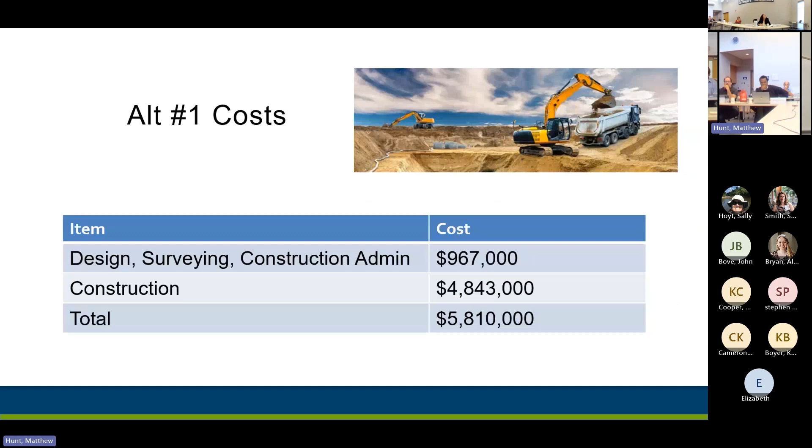That's good. Could you put the last page up? We're kind of thinking about what we're voting on. The last page, it was kind of a synopsis. Right, there's this list, are you trying to look at a list of the options? Yeah, the last one presented. This one? I have a list that had a comparative of each one, not the cost, but just the options. Yes, okay, excellent.

And the city is tasked with fixing the high hazard problem, right? Correct. We have received an official letter from dam safety saying this dam is deficient. There were deadlines for us to respond. We've responded within the deadline, and we have acquired an engineer to move forward with this. And now we're working under other deadlines to move forward with an improvement that would restore this in compliance with the high hazard dam safety requirements, which requires passage.

I think we went into the details previously, but passage of what's called a 1/3 PMP, probable maximum precipitation. So that's part of the requirements for the upgrades of the spillway, it does have to pass more water than it was originally designed for in order to meet the current standards of a high hazard dam.

So that's partly what's driving the cost of the improvements here. It's being upgraded to a state that is a higher level of service than the original dam was designed to meet. Is there a road budget that would help pay for this as well? It seems like a road issue as much as a stormwater issue if you're just replacing the pond. I'm sure you guys know more about it too.

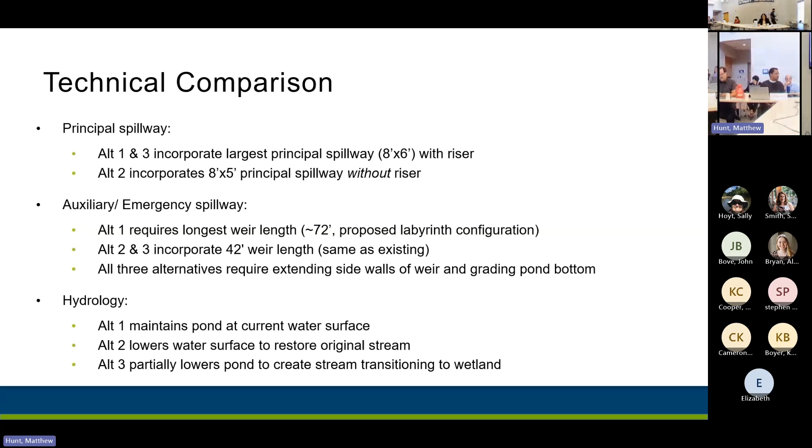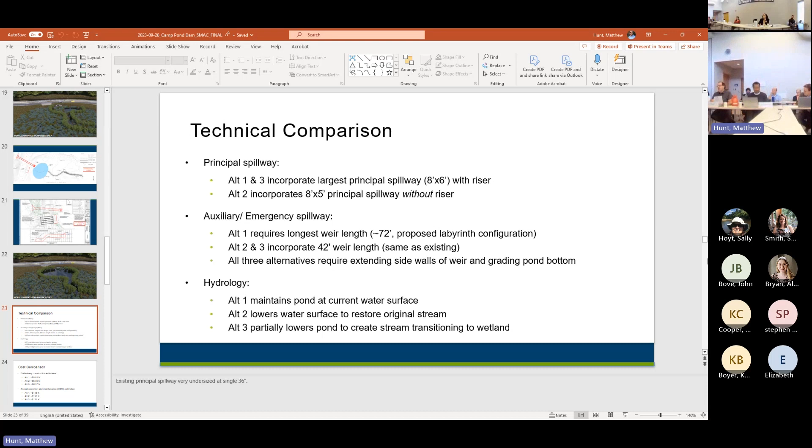Like Robert Newton was talking about. All right, so we are at the top of the hour and we have not heard from Ben or Forrest. He is an invited guest, and if the commission can still make the time to receive his presentation, I think that would be preferable for us and for Forrest, since he's an outside guest and it may be difficult for him otherwise. Commissioner, good with that? Yes. All right, yes sir.

I'm not asking for any money. I'm just here to introduce... which already give you. Yeah, we're good, I'm just here to introduce Forrest.

Raleigh is part of the Upper Neuse River Basin Association, which is basically a group that looks after - specifically for this presentation - Falls Lake and everything that drains to it. The UNRBA is vital in keeping everybody together about Falls Lake and collaborating with the herding cats of all the different communities, large, small, and everything in between. The city is very interested in Falls Lake since that's where we get our drinking water from, and we are doing primary water treatment for it. So what happens in the rest of that watershed is key. We have about 1.2% of the residences in the Falls Lake watershed, but we treat all the water that comes to it, so obviously we want a bigger say in what goes on in that watershed.

An ongoing effort UNRBA has been doing is water quality modeling for Falls Lake, to see what the Falls Lake rules - put in place in 2011 by the state of North Carolina - as a way to help the nutrient loading in Falls Lake and see what we can do about that. The UNRBA, with community support, wanted to model Falls Lake to see what was actually going on with water quality, and what the nutrient goals could be and should be for Falls Lake, and whether the state standards address that, and how we can get there in a more efficient manner. But with that, for us, the executive director of UNRBA has a bit more on that.

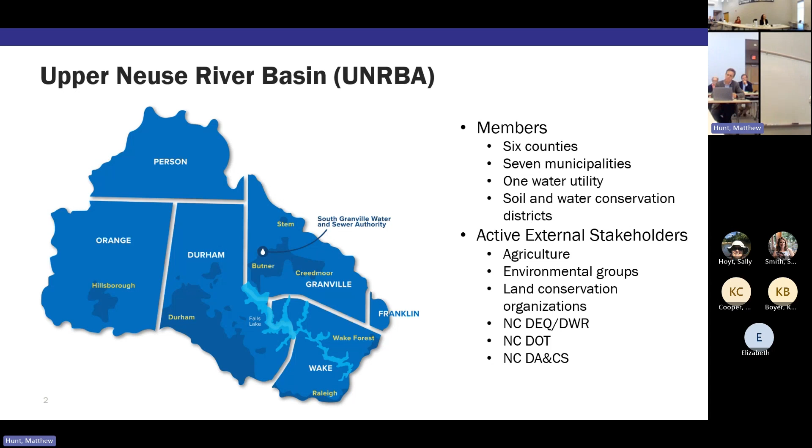Conservation is extremely important. But we've made some very dramatic findings on this watershed and on this lake that affect our ability to try and achieve the existing water quality standard for chlorophyll A in this lake. As you all know, more than 500,000 people drink this water, and it is obviously the number one highest and best use for human beings.

Now, ecology is extremely important, and ecology is a big part of that as well. It provides downstream protection from flooding—that's why the Corps sited this project. It wasn't sited for water supply; they didn't build it for the city of Raleigh to have water supply. They built it because of flooding on the Neuse River and down at Kinston and other locations.

It also provides minimum downstream flows, which are very important. In the first part of my career, I was a modeler for the state. I set effluent limits for wastewater plants all around the state, including on the Neuse River. The Neuse River is a 7Q10 flow. The drought flow was very low, and therefore it had some problems with habitat and other things. So now we've got a minimum release.

Same thing over on the Jordan side—I mentioned Jordan again as probably an alternative review of how to deal with this. It protects habitat downstream because of that release, and it provides a tremendous amount of recreational activity on the lake.

I don't know how many times you've been out there. I always try to go out and look at the landing areas, the people going out—there's a lot of folks using the lake. The lake is meeting its uses, its actual listed uses, which are recreation, biology, water supply. So it is providing all of those.

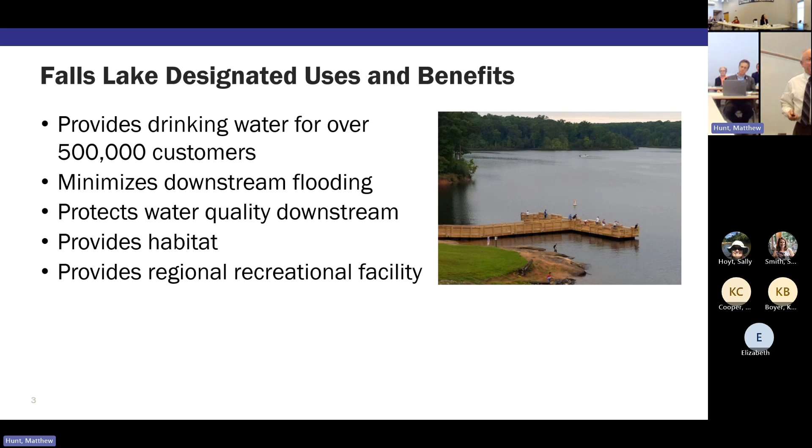It has been a facility that's been very controversial. One of the reasons is because the state in 2008 said the lake was not meeting the water quality standard for chlorophyll A.

Put it on the Section 303(d) list of the Clean Water Act, and that initiated the state to have to come up with either a TMDL, total maximum daily load, to meet the standard, or a water quality management plan. And that started the wheels rolling.

The legislature passed a bill in 2008, or thereabouts, I don't know exactly, Whit, if you remember, but somewhere along there that directed the Environmental Management Commission and the Department, now the Department of Environmental Quality, to adopt rules. They gave them a deadline of 2010. It took them to 2011, but the legislature moved it to 2011.

The state had to pull together their modeling. They monitored between 2005 and 2007, built a model, and based their rules on that model. The numbers that came out were extremely restrictive. In fact, these existing rules are the most restrictive rules in the state of North Carolina for nutrient management. And they're the only rules in the state being implemented where local governments are being asked to roll back the impact from existing development that was on the ground in 2006.

I enjoyed the earlier presentation. I know where Pigeon House Branch is at. I did that back in '76, though we had a different name for it — we called it Pigeon Branch Creek. Because it was in bad shape, and I'm glad to see they're still working on it and doing those things. I enjoyed the cost figures on reducing, on retrofits, on small lots.

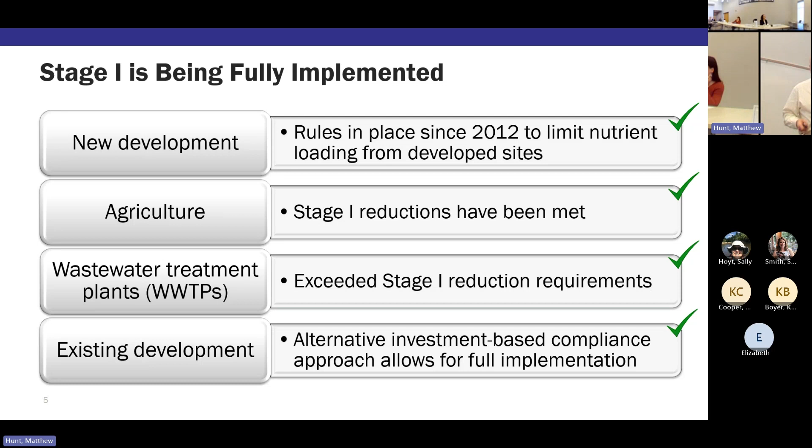Our first year, which was 2 years ago, $5 million were committed. And so this year the reports are coming in for the second year. So it's been very successful.

Agriculture has actually reached their stage 1 requirements already, and the stage 2 requirements are 40% in nitrogen and 77% in phosphorus for all lands that were in development in 2006. That's an amazing thing. Our calculations, the first year we worked on this to get all of our approvals from the state for our monitoring and modeling program, we evaluated that, and it was impossible to achieve 77. You would have to treat the runoff from every piece of developed land at least twice in the watershed to get to 40. We found out since then it's even worse than that.

So we've been doing this for a while. One of the things the UNRBA committed to early on, which is one of the reasons why I'm part of it, is a science-based process. Just because you're against something doesn't mean you can just say, I'm not going to do it. We have to develop the science that guides us in what we're doing.

The folks in Jordan took a little different position. They've gotten the laws modified and the rules modified so they don't have to necessarily implement the more costly aspects. The point sources are reducing it.

So we developed our monitoring program, 4 years of intensive monitoring, which is more than what the rules require for this adaptive management. As part of the negotiation that Raleigh helped with for stage 2, it opened up the door for adaptive management. UNRBA said, we'll study this lake and this watershed, and we'll come up with some information that will guide what the rules really need to be, and we'll readopt the rules.

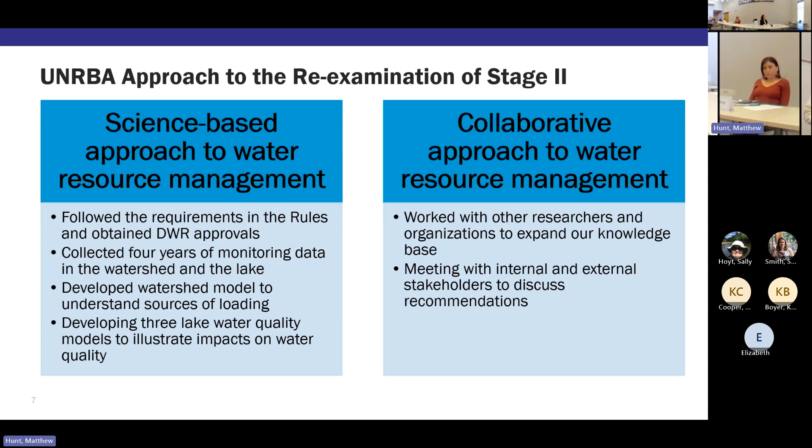$10 million have been invested in the study. It's a tremendous amount of work, and it is a collaborative process. I could show you all kinds of graphs, and at the end of this presentation is a list of links, and I think Ben provided that to the group, and Cam provided to them that presentation.

And so you can look at those. We're developing our modeling reports, we've got thousands of pages of modeling reports. It's just extremely interesting reading. It'll keep you up all night. Just keep reading that, can't put it down.

But we have made some really amazing findings that really weren't factored in. This watershed doesn't look like I-85 when you drive through it across the lake and through Durham there. It's not all like that. Almost 60% of the watershed is forested. Now that's patchy, but it's 60%, that's a lot.

And 75% of the watershed, once you take open water and unmanaged land and wetlands and surface areas of the water, because there's several impoundments in this, that 75% of this watershed is either natural or in a semi-natural state that is not managed. In other words, there's no nutrient application to them, there's nothing being done. In fact, our study we developed a watershed model, the WARMF watershed model, the WARMF lake model, and the EFDC lake model, and the statistical model. We've done 4 models for this to help guide us in what we're doing.

And what we have seen is that since 2006, because of the activities of the watershed, we've seen significant reduction in nitrogen, almost 30% reduction in nitrogen, just because of the actions between 2006. What we haven't seen is we haven't seen a change in the chlorophyll A.

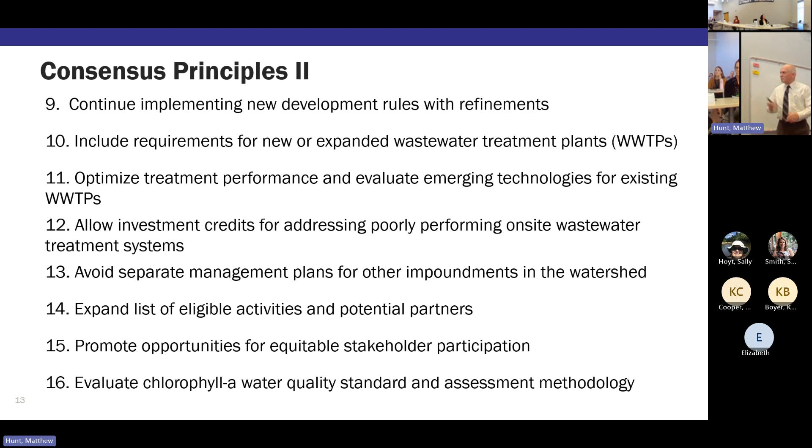We've looked at all of our jurisdictions, and certainly the City of Raleigh has comprehensive vision things, and we've correlated that with what we are proposing in our consensus principles, and we think there's good correlation. I think green infrastructure, pushing for carbon neutral, pushing for collaborative processes, sustaining, growing, successful neighborhoods - that's all part of what we're trying to do.

The next steps are these consensus principles we presented to all the local governments in Raleigh on October the 17th. And we're going to try to have all of those resolutions in hand by the November 15th meeting of the board of the UNRBA and get those ready.

DWR says they think the rules will take till 2027. I think we can get them done in 2025. I think we've done enough pre-work that we can do that. I'm gonna work hard to do that, but I ain't gonna be working much longer, so I'd like to get that done before I get home.

And so this is the additional information. We have lots of information on our website and it provides more background. We will have our modeling reports up there soon. They're in final review now, and the Division of Water Resources have been at the table.

So this is what the UNRBA has been doing. It's been, I think, one of the most innovative ways to look at this across the state, and we think that DWR is coming around - they're looking at this for Jordan, they're looking at this for High Rock Lake, they're looking at this for Albemarle Sound. So anyway, that's the story.